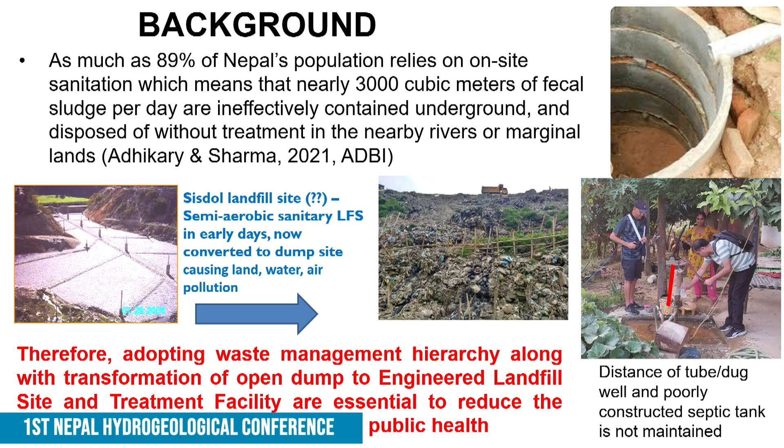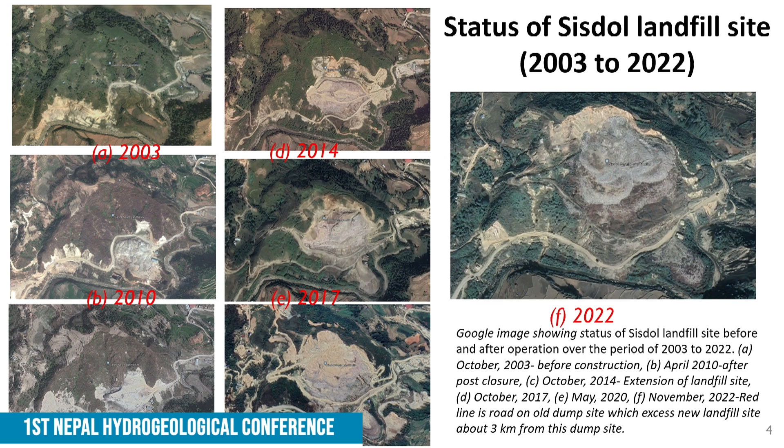Okay, this is how our Sisdol sanitary landfill was converted to a dump site. You can see the photographs from 2003 to 2022. And finally, we converted this almost 8 hectares of land to an open dump site right now. And you can see the area here.

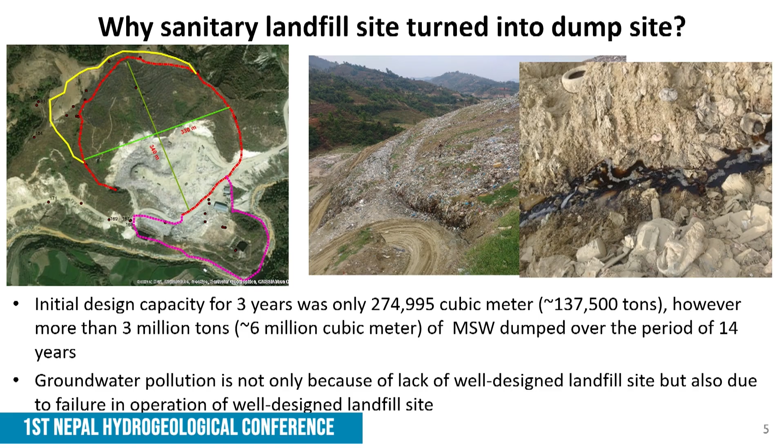Initially, it was designed for just 2.5 years, nearly 3 years, to accommodate around 150,000 tons of waste. But finally, we disposed there more than 3 million tons of waste over the last 14 years, and this good sanitary landfill site was converted to a dump site and became one of the major groundwater polluters.

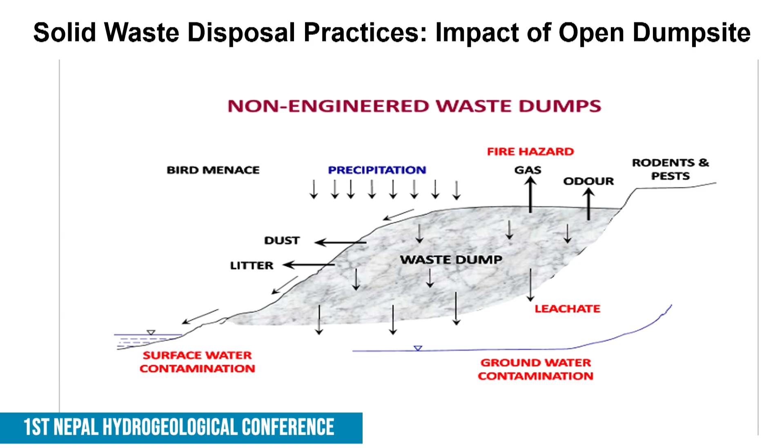All of you know how at this disposal site the contaminants reach the groundwater system without any proper barrier system, without good liners. If you don't have any liner system, ultimately the leachate goes to the groundwater, or it goes to the surface water. Therefore, I'm talking about how this open dumping practice can improve technically as well as in policy, enforcing some standards.

The first thing, going from open dump to engineered landfill is not like a revolution. It takes time. This is a gradual process. But at the same time, you have to think not only about design, not only about operation, you have to think about site selection. Right now, most of our disposal sites are located on the river bank, in the floodplains and other places. First of all, we have to think about where is the better site for the construction of these landfill sites. That's why we have to start from site selection.

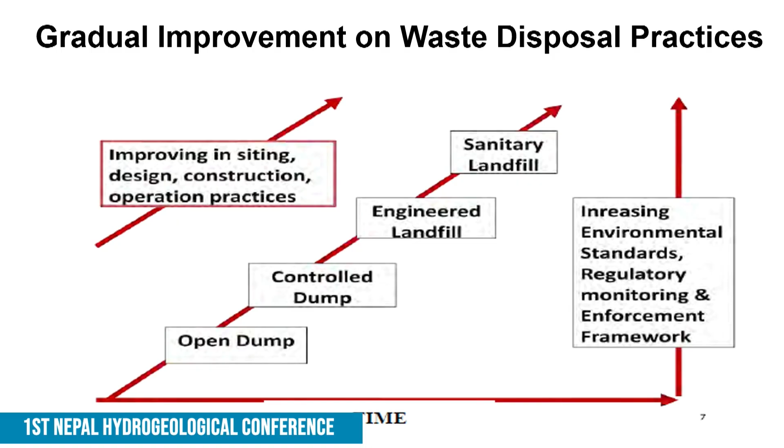Then we have to do proper design, proper construction, and finally the operation should be as per our guidelines, which we have prepared for sanitary landfill site operation. And when we improve technically, at the same time you have to increase the environmental standards as well as the regulatory monitoring and enforcement framework. When you work together on both sides, then we can convert this dump site to an engineered landfill site.

I'm not going to talk in detail about how to do this in this project, how to identify the site properly based on the different parameters. It's not only hydrogeological, not only geotechnical, or not only accessibility. All the social and environmental considerations have to be thought about in the site selection of the landfill site. And after the site selection, a lot of rigorous assessment will have to be done. And finally, the consultation with the public.

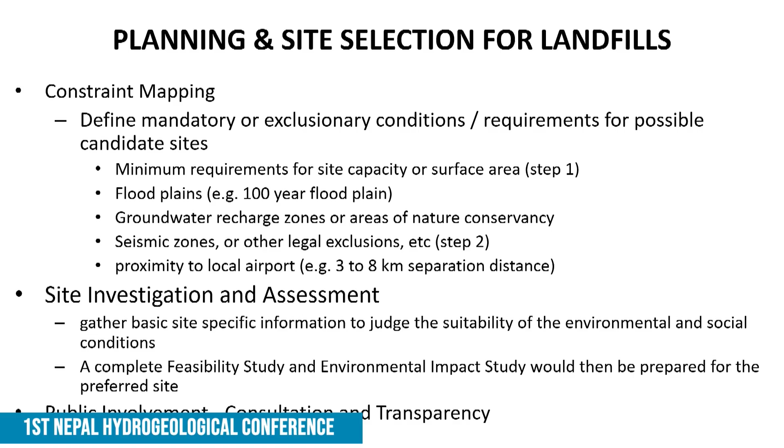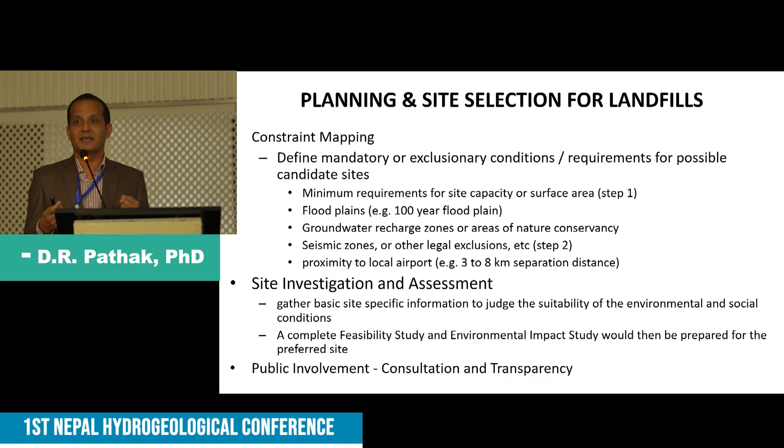This is completely lacking in our context because normally our experts or government side want to hide from the public. When you go in the daytime, the municipal authority says we have to go in the evening to see the landfill site area. People come there and they obstruct, that's why that type of lack of transparency doesn't work for proper operation. That's why this consultation with the people is very important for the site selection as well as the design of the engineered landfill site.

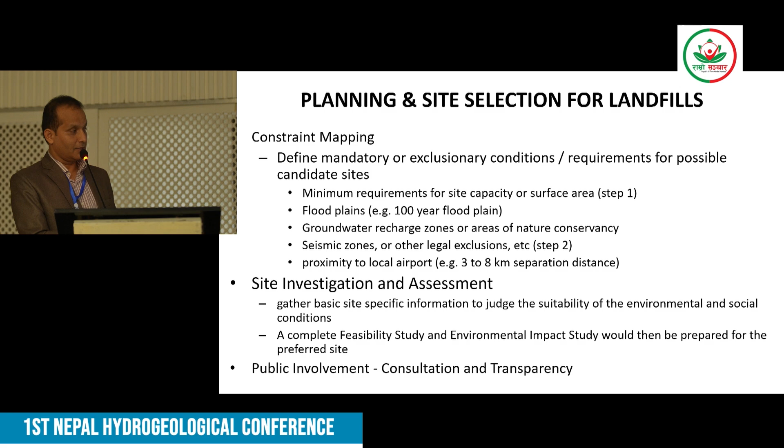This is how to choose the site depending upon the type of land. The major things we have to consider in the design of the engineered landfill site: the first thing is how to develop the barrier system, a proper containment system. There should be good liners, a good leachate collection system and gas management system. And of course, there should be groundwater protection as well as surface water control and control of subsurface migration of landfill gas. Methane is one of the major gases generated at the landfill site.

And of course, the monitoring of the groundwater and leachate. We should have groundwater monitoring wells on both the upstream and downstream sides. And most of these monitoring wells are missing in the sanitary landfill sites we have developed. Site closure and the post-closure plan are also very important. After 10, 15, even 20 years, gas is still being generated. Even leachate is continuously generated, and you have to continuously monitor the groundwater wells as well as other leachate sources.

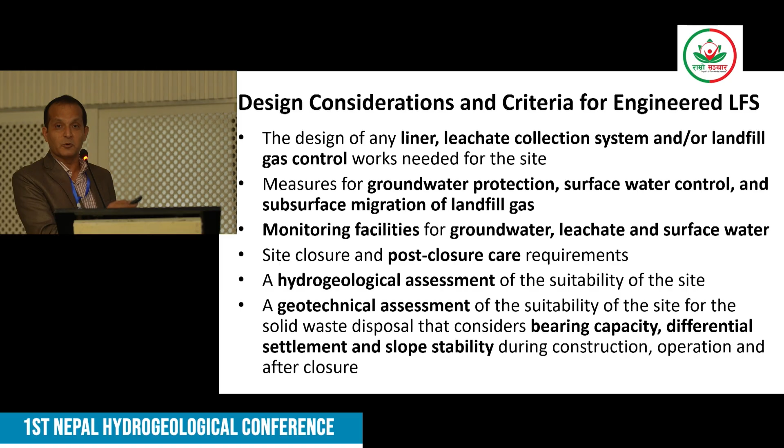And the major missing part here is that sanitary landfill, engineered landfill, whatever you say, everyone calls it a dumping site. So when you say dumping site, you don't need any hydrogeological assessment, any geological assessment, any geotechnical assessment, and you don't design any liner or barrier system. And finally, all this leachate goes to the groundwater system. And we say our groundwater is not fit for drinking. This morning, our minister said the shallow groundwater is not fit for drinking. This is the reason. But we are not talking about these things.

This is a proper engineered landfill site, at least how to design the barrier system, like clay liners and geomembranes, a combination of different ones, because we have a lot of technology these days.

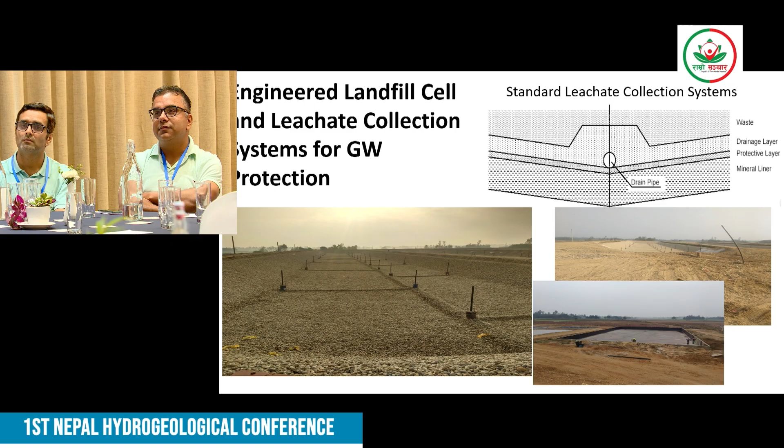You don't worry about the technology, but we are worried about how to integrate these things in our engineering. It's a very important thing. And how to operate these things properly is another important thing, what we are missing right now.

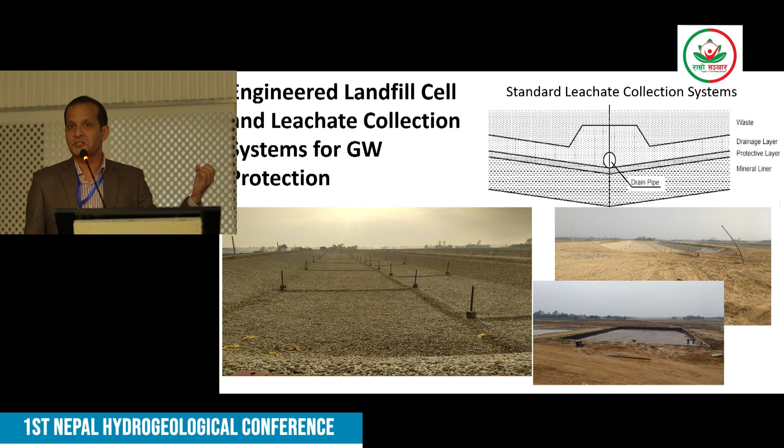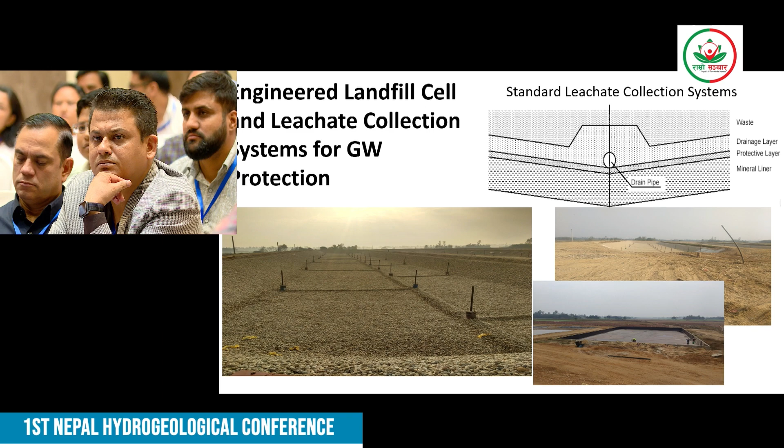This is the existing landfill site we have already developed in a municipality of Nepal. This is one of the examples, Nepalganj. We have a very proper barrier system, a very good leachate collection system. But finally, if you don't have good operation practices, this again is converted to a dump site, and many cases have already happened in our municipalities. This is the pity part. Yeah, this is one example.

Recently, Bancharedada, everyone knows this name these days. This is Bancharedada. We have designed it properly. We have very good clay liners, geomembrane, and everything is there. A very good drainage system. But you see, when you start to operate and you don't follow the operational guidelines as per the engineered landfill guidelines, then it's finally converted to a dump site. Again, another problem is happening there. All the leachate is going to the river system or ultimately to the groundwater system.

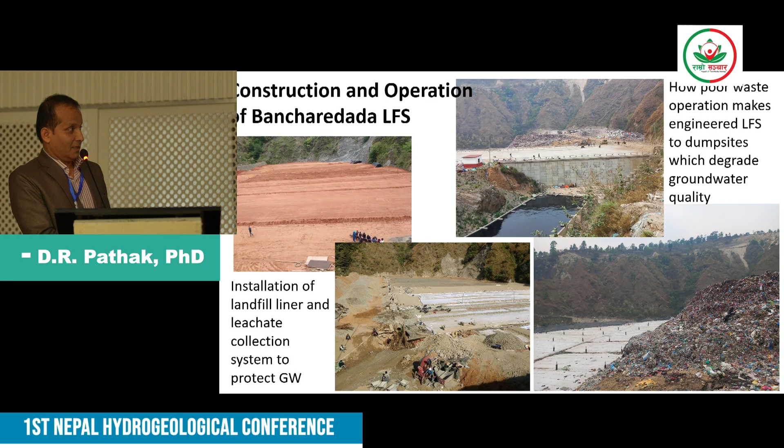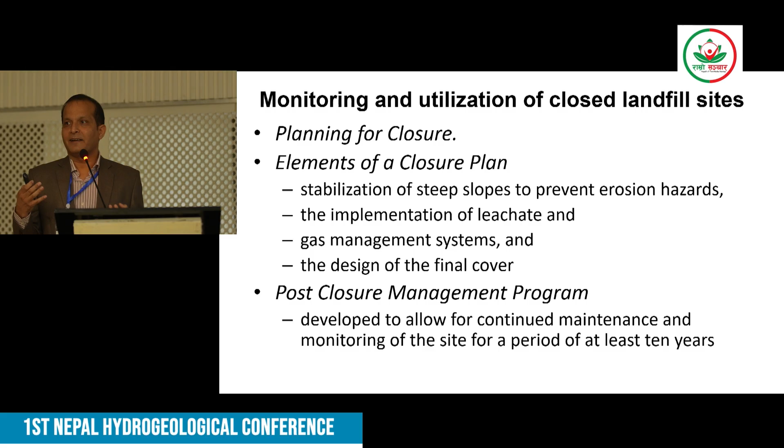I'm talking about monitoring and land utilization. Of course, these are very important things. When you're talking about the sanitary landfill site, you have to think about the post-closure plan 20 years before. How to utilize this land, how to continuously monitor the gas and other water quality parameters after the post-closure. These things are very important. I'm not going to detail this.

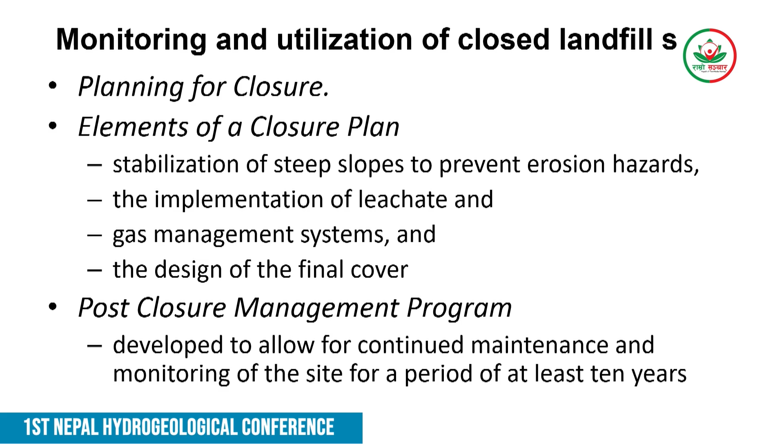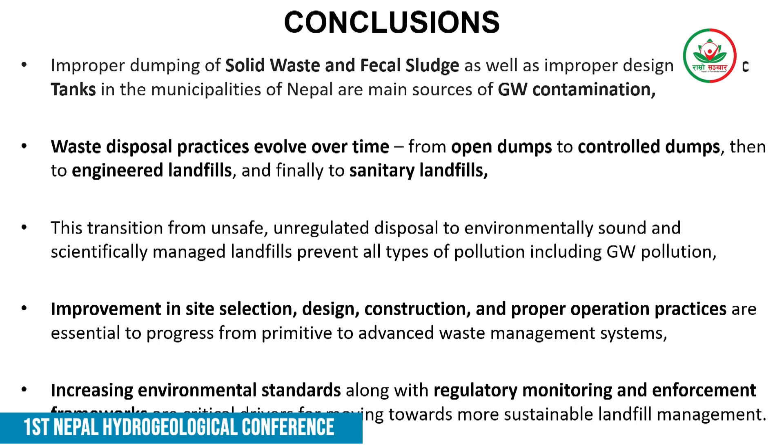And finally, I want to say something here. First, we have to gradually change our open dumping practice. Almost 90% of our municipalities dump the waste. We have to gradually convert these dump sites to controlled, then to engineered landfills, and ideally to sanitary landfills. As an engineer, I would say the engineered landfill at least. But not only site selection, design and development are important. You have to think about the operational practice also.

Converting a dump site to an engineered landfill needs the combination of the knowledge of hydrogeologists, geotech, soil scientists, and environmentalists. We started to do it, but finally we failed again because of poor operational practices. The good sanitary landfill ultimately converted to an open dump. That's why we have to work vice versa.

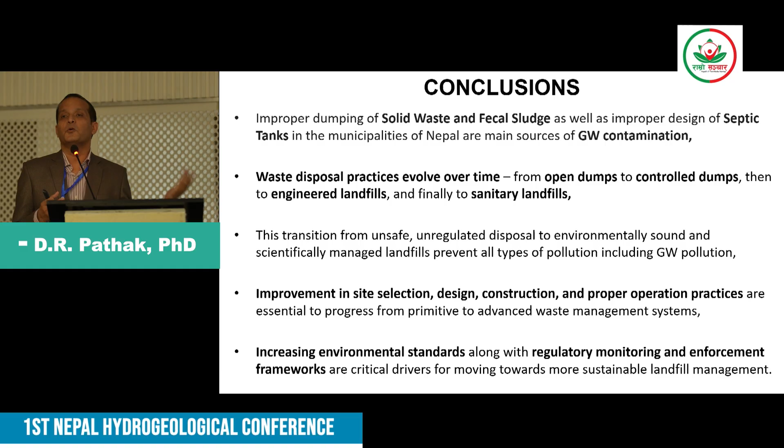As waste management students, landfill is not the only solution, I have to say. Because this is the hydrogeological forum and all are geoscientists, I'm focusing only on how to convert. This is the last resort for the waste. That's why we have to start from this point. But landfill is the only venue where not more than 30% of waste has to be disposed. 70% or more has to be recovered and treated as resources or raw materials. This can be done. We have a lot of technology.

Having said that, I've already gone over time, so I'm not reading all of this conclusion. This is the bottom line, what I already mentioned.

We have to stop degrading our water from the mountains to the Tarai. Even on Mount Everest, you have already read the news, there is microplastic in the ice core, at almost 8,000 meter altitude. We have waste there. If we don't have a good collection and transportation system, it degrades or spreads and finally goes to our water system, or if you burn it, to the air, as one of the major polluters. So we started the pollution from Everest to the city area.

That's why waste is not only related to urbanization or urban centers. These days we're talking about marine pollution and marine plastic. Even though we are a landlocked country, so many experts are working on marine plastic pollution, but we are not talking about mountain plastic. Our mountains, our Everest, are full of plastic. It has already become like a dump site. We have to think about mountain plastic. We have to think about proper waste disposal.